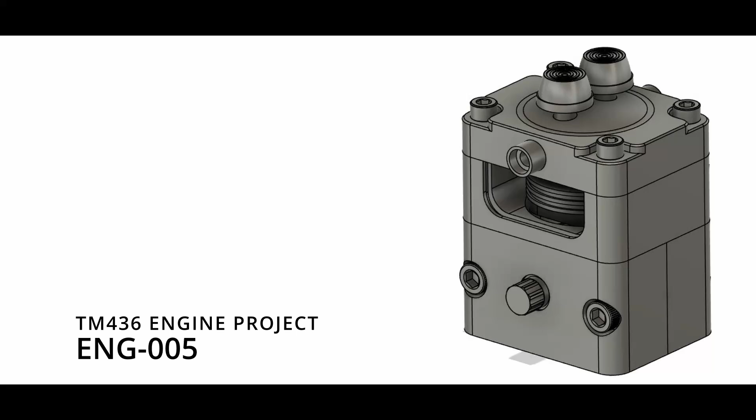ENG-005, which is our engine block cutout. I don't have a drawing for this one today, but I can tell you a little bit about what's going on. Everything's going to be machined as seen. The holes, however, are going to be through bolts for quarter-20 bolts, so we'll make sure to choose the right size bolts for that.

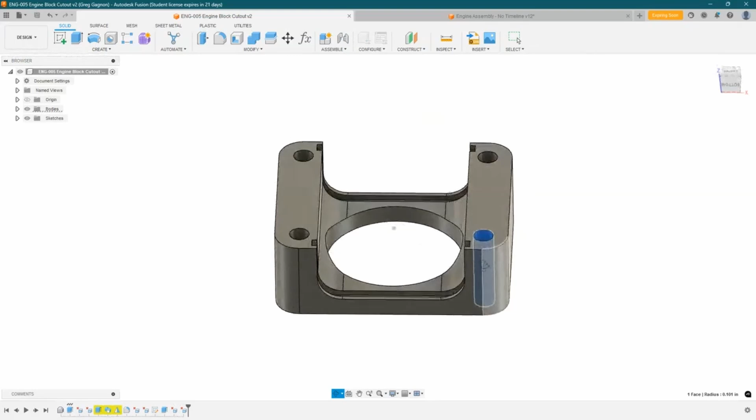Going into this part seems pretty not too bad actually. I see one operation from the top where we can machine most of the part. We will then probably flip it around to the bottom and machine off all of the extra stock from op1.

Maybe we can try something new where we machine all the way through our part in op1 to give us a bore for op2 to locate off of, just for fun. There's no reason why you can't touch off the X and Y as we normally do, but we can maybe try to set our XY zero as the back of our part there.

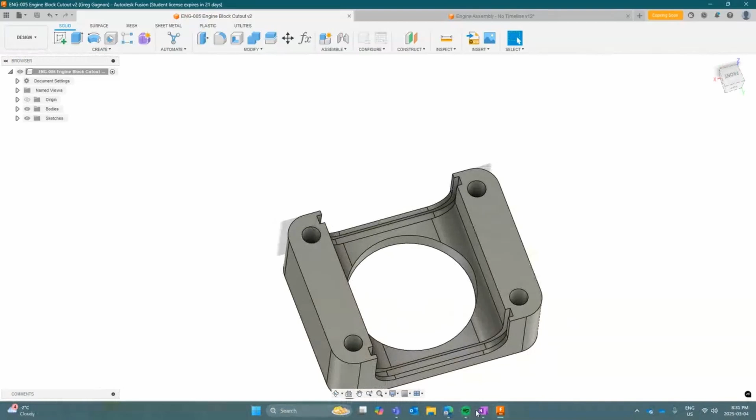And then we'll flip to each side and just stick it up in the vise, and we can do these grooves that will have our glass cutouts sitting within. So I think it looks good to go. We can open up Mastercam and get going. So open up Mastercam 2025 and we'll let that load.

We will try something a little bit different. With the radius, we have two options. We could, as we cut out the grooves, as we stand it up, take an end mill and kind of machine around those surfaces. Or in op1, what we could use is a ball nose end mill to machine that feature, which we might as well try that out to see what that would look like.

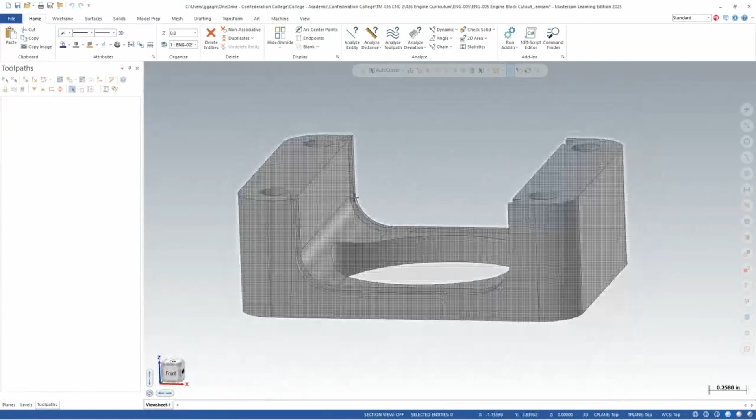I'm going to go to my file and make sure that I'm in inches to begin with. And then I'm going to go file, open, and I'm going to go find my assignment. There we are. And now that I have that open...

Default, let's take a look at what we can do with our stock size. So before we do this, let's go in here and change our toolpath, or just say ENG-005. We will make this program, let's say 436.5, part number 5. Our model is this guy, and we'll come back in and select our stock later once we have that made. So we'll go to our wireframe, bounding box, click on our part, hit OK. Okay, so we have 2.375.

Okay, this looks pretty simple to me. In my Z, I see our Y could just bump up to 2 inches, our Z can bump up to 1 inch, and then we'll have to cut our part to, let's say, 2.5 inches. That leaves us about 50 thou on each side.

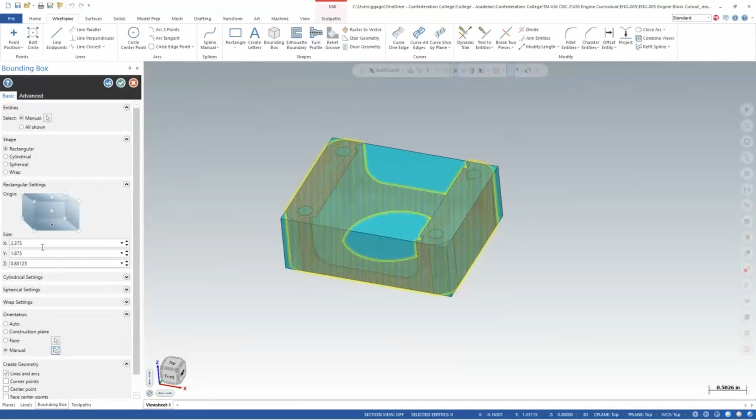So I like that. I guess we can change the orientation to my X, Y, Z. Okay, it is already correct. So let's do that. I like 2.5, it's easy to cut to. Y doing 2 inches is a perfect amount on each side for our Y, and our Z being 1 inch leaves us with some material.

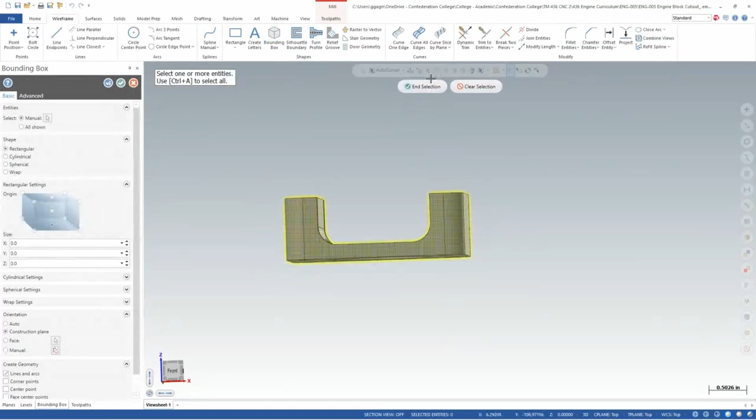Now I should have made sure that this is from the top. Now I probably won't, let me adjust it, knowing how Mastercam is. So let's exit out, let's go back in and try that one more time. Make sure we turn on our solids. And in fact, I should have been having a stock level here, which I forgot to make. I wonder if I press yes now, if it'll do it there or not. Just hit OK.

And that made it within my stock level. Nice, beautiful. As always, I'm just going to take my part and move it 20 thou downwards. And I'll clear out my colors.

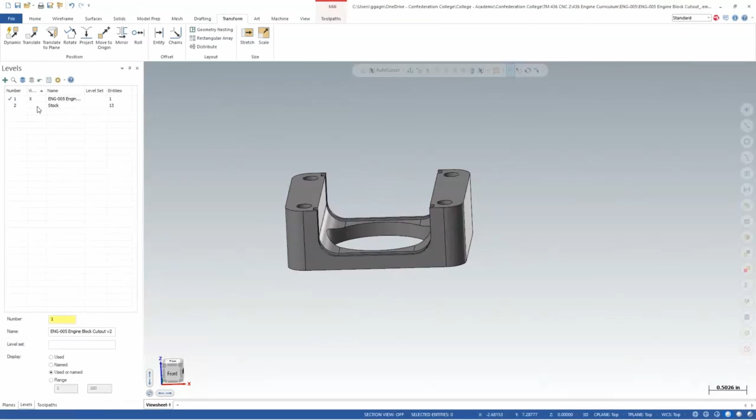I need to set my plane, so I'll turn my stock back on and we can make our plane. I'm not sure if we've done the center of our part before. We could this time if we'd like. Yeah, let's do the center of our part, let's just do it for fun. I know we typically go back left, but for today, let's do it in the middle. That way on the machine, you could see how you would do it if your XYZ was set to the middle of your stock.

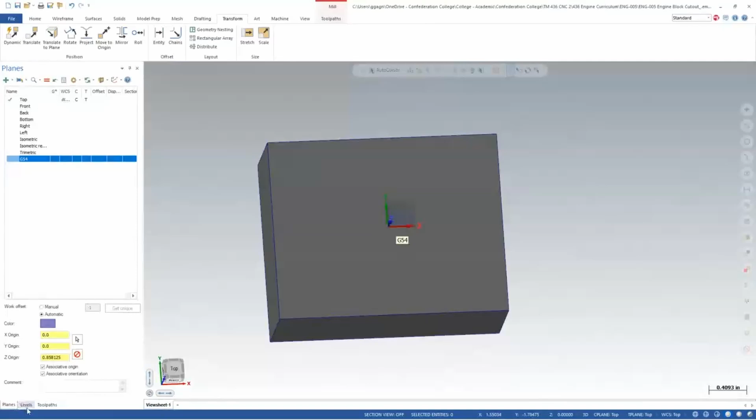We'll call this G54, and we'll make sure that this is actually to the top of our part, not the top of our stock. So we'll just drag that down so that's in line with the top of our part. Hit OK.

Good. We can go back to our stock setup area and we can select our stock as our stock for our simulation. Everything else should be good. We can go ahead and start our toolpath, I believe.

So we'll start with our face mill. We can just grab the top face of the part for that.

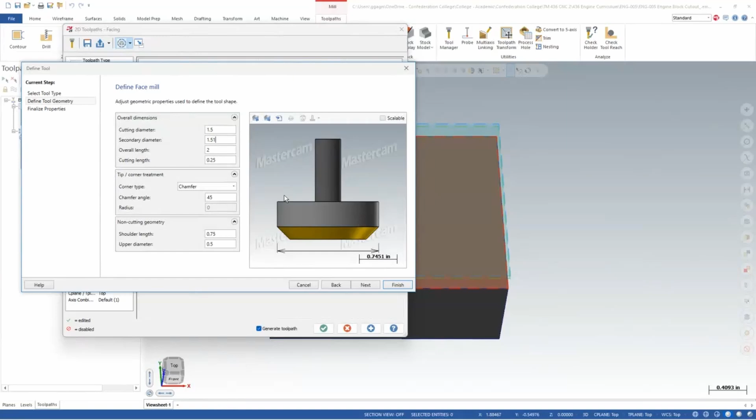For this, we'll select a 2-inch face mill I'm going to use, but in this case, I'm just going to change this to 1.5. I could create my own tool, but let's do that instead. Instead of selecting a 2-inch face mill and modifying, let's just create a tool. Let's select a face mill and make a 1.5 with a secondary cut in diameter. It's also 1.5, but it doesn't let you select 1.5, so just say 1.51. Overall length and cutting length don't really matter that much.

Everything should be pretty good. If we just want to make the upper diameter 1.5 as well, because that's kind of more what our face mill looks like, it does not matter.

For aluminum with this face mill, I like 8000 and 32. And we'll go plunge rate 100. This is 1x2-inch stock, so you will need to do zigzag.

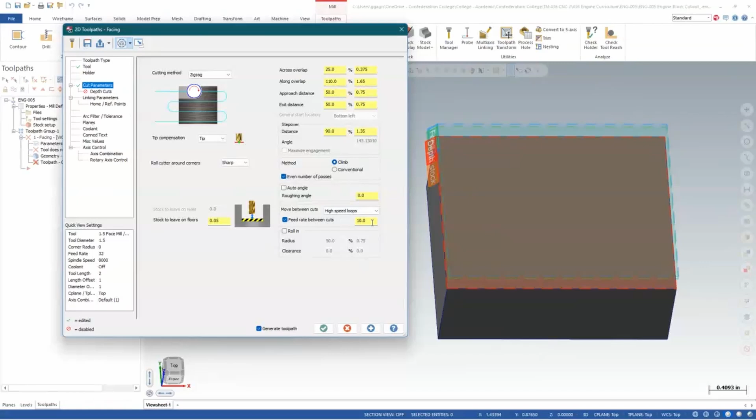We'll do a step over of, I don't know, like 90%. High speed loops. Feed rate between cuts, let's just go to 100. Stock to leave on floor is 0. No depth cuts. We'll do absolute for everything.

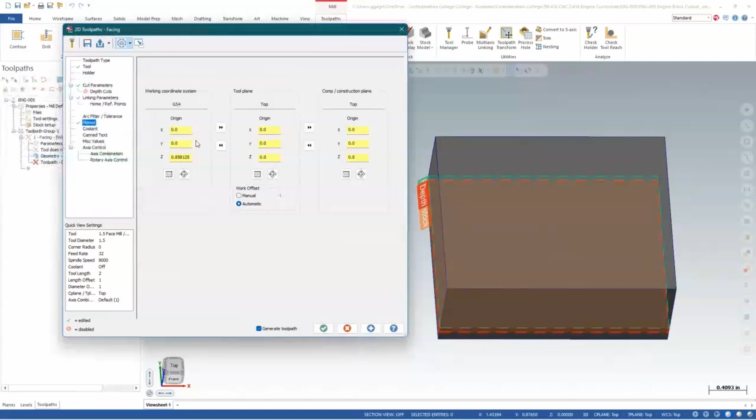0.1, 0.1. Top of stock is 0.02. And this 0. Our plane is going to be actually my new plane. I'll make sure to change that for my next toolpath, and we will turn my coolant on. Hit OK. And there we go.

Should be able to turn off my stock and see that my tool is cutting the top of my part. Before I forget, I'll go to my planes and set my planes to my G54 for all future toolpaths.

Now I'll go and make my stock model to represent what my stock looks like before my OptiRough. My initial stock shape will be based off my model, which will be this guy. Triple click. And source operations will select our facing toolpath.

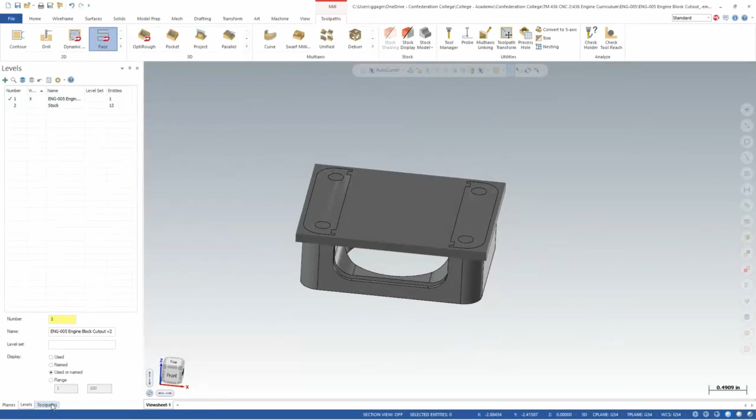And that does not look good, probably because my stock plane is checked off. Let's turn that off. Let's try that again. There we go, much better.

Looking good. We'll do our OptiRough. Our machining is going to be our part as per always, and we'll do 5 thou on the walls and the floors. Toolpath control. My bounding chain will be the outside of my stock.

So just like so. From outside, compensate to outside, and about, let's just say 1/2 inch. It's fine. See if I have to increase that later.

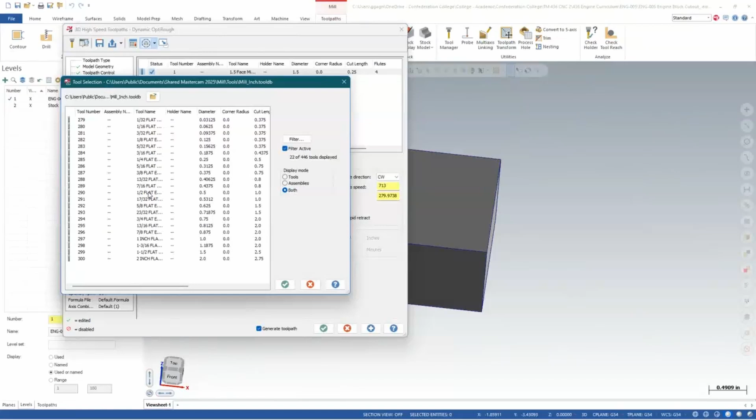For my tool, it doesn't really matter what tool we use, but let's today choose a 1/2 inch end mill. I know my 3/8 does a nice job too, but let's do a 1/2 inch end mill. This will be tool number 2.

Finish. The spindle speed will go, today, let's see. Let's do a couple things, okay? Because I do get the question a lot of times, Greg, how do I know what my speeds and feeds should be? It's great questions.

So let's go to Harvey Tools. I'm just choosing this manufacturer, so I'm going to pretend that I have a specific tool. I know that in my shop, we typically use ISCAR, but Harvey Tools has a good chart that I like to use.

We're just going to go to their end mills. Actually, sorry, we'll go to their products. And I'm just going to pretend that I have a certain end mill. So if you are wondering how to figure out what your chip load is, really everything comes down to chip load, right? I mean, the RPM is set by your cutting speed and your tool diameter.

Now that does matter. You're not going to turn every tool as fast as you can, but typically if you're working within tools that are under half an inch and you're cutting aluminum, you're more than fine to spin that tool pretty much as fast as the machine can. So typically I always do. That's not always going to be the case, but we can get that cutting speed and we can do the calculations ourselves.

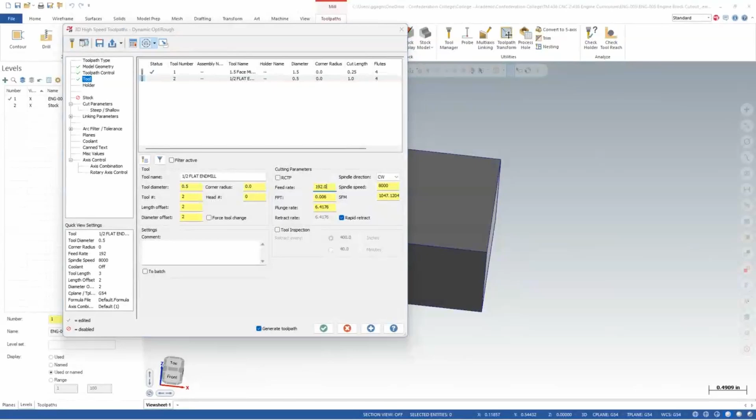If you really want, you can go to a site like this one, which I've been using decently - it works great. Instead of having to look up the charts, I just like to use this. This is pretty good if you're just using standard tools, not a specialty tool like Harvey. When you're cutting a specialty or hard metal with a special tool, you should probably follow the manufacturer's advice specifically. But for just cutting material when you want a good starting point, this site has been working great for me.

So I go to this, what they call Speed Doctor. Let's say I am milling aluminum.

I want speeds and feeds. You just fill out what you need to fill out, so you don't really have to worry about that. You're just going to go find the aluminum you're cutting, so say 6061.

My max RPM is 15,000 on my machine. You could input horsepower of your machine if you want. Hit next, number of flutes. Our tool, let's say, has, I think it does have 4 flutes, or does it have 3? It might have 3. Cut depth, let's just say we're cutting depth of 1 inch, right?

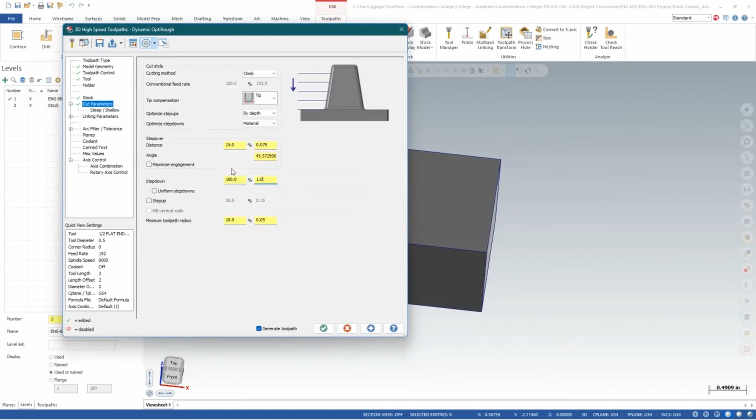So I just apply it to this new part. Myself, I like 12,000, 150 for my end mill. My plunge rate is 100 because I'm not really cutting. We will do a rest material from one other operation, which is my stock, my cut parameters. My step over is going to be 15%. My step down will just be the entire part, so whatever that is - my part thickness was, let's just say 1 inch. And then step up will turn on. I typically like a 10% step up, so we'll do a 10% step up there.

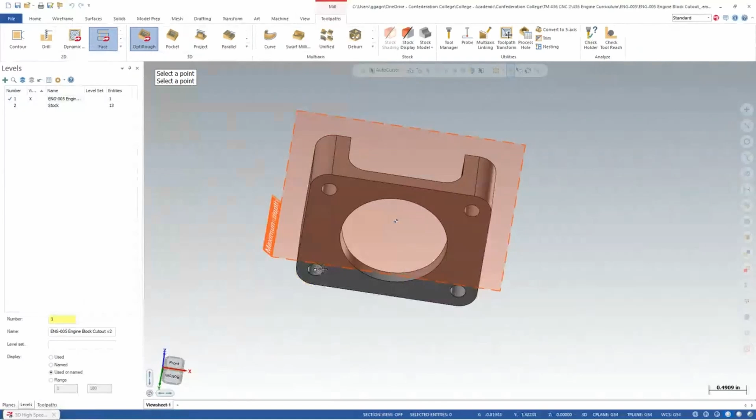We can turn on minimum depth if we want, and maximum depth. Maximum should be... turn off our stock. Right there, and then we will want a little bit of a breakthrough, so let's just minus another, I don't know, not too much, I guess, just 20 thou. Clearance 1 inch, back feed rate 500.

Everything else is good. I don't like when it does a vertical lead in, I just like the horizontal, so I'm just going to do a horizontal. Planes, coolant on, hit OK. See what this looks like.

Okay, I don't love it, so we'll fix this. What I didn't love is this on the outside. I want it machining from the outside more, I don't want it stuck in these corners. Something's getting it stuck, so let's go into my cut parameters.

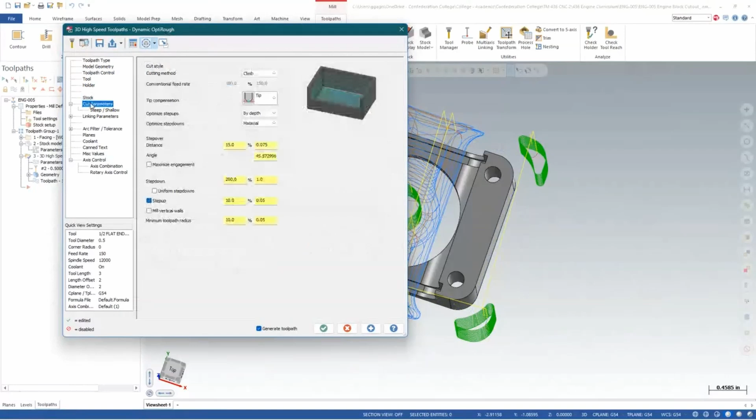Sorry, toolpath control, offset distance - oh, this was supposed to be 0.5, but it probably needs to be even more. So let's just do 0.75 and see if that looks better. Much better, there we go. The way it's working from the outside, and then it cuts in, helixes in nice and well, and then it cuts outwards.

Beautiful. It is plunging when it cuts, but 100 is fine for that. Breaking through a little bit. Nice, I don't love that. I don't like when it does this vertical move on the inside, I just like it being horizontal. It kind of throws me off when I'm on the machine, because I think it's stopping in the Z and then it just still goes a little bit further down.

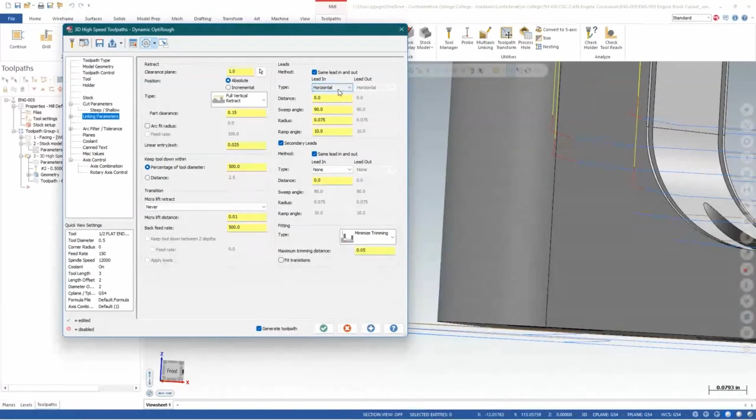It's not the worst in the world, but okay, horizontal sweep angle. Why don't we do, like... I wonder why it does that.

Linear entry exit. Micro lift distance. It's not the worst thing in the world, so whatever, we'll leave it. You'll notice how it steps up those walls because it's actually going to leave.

It's trying to cut that radius, but it's not letting it, right? It's going to cut as close to that radius as possible by stepping up the walls without cutting into it, which will leave just a little bit of material there for finishing for our radius mill. Okay.

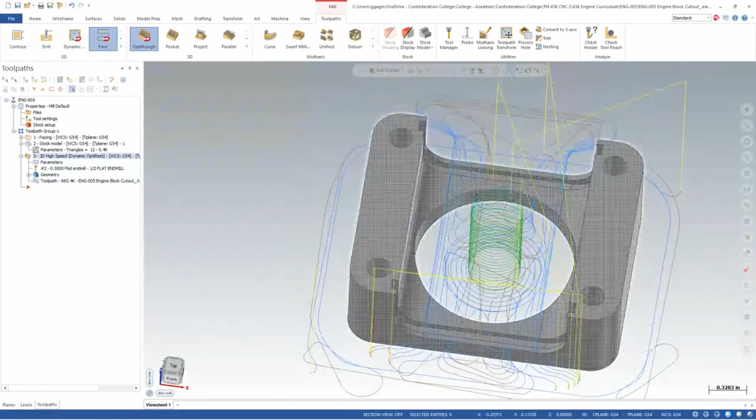Moving next, do some finishing. We'll probably just finish the floor with the end mill, and then for the radius and the wall, we could probably finish that with the ball nose end mill at the same time. We can't use the ball nose end mill to finish the bottom because the ball can't step over, but the ball can machine the radius and the vertical at the same time because it has a straight flute, and then the radius, which will give a nice seamless finish. Then we'll work to get rid of the seam on the bottom. If the tools are slightly different lengths, that transition might not look the best, but we'll get that dialed in.

So let's start doing some contours. Maybe we'll just start with a contour on the outside. Just like so. Okay.

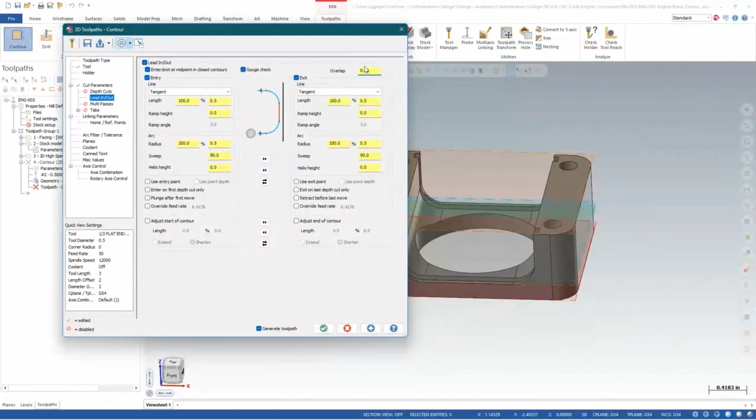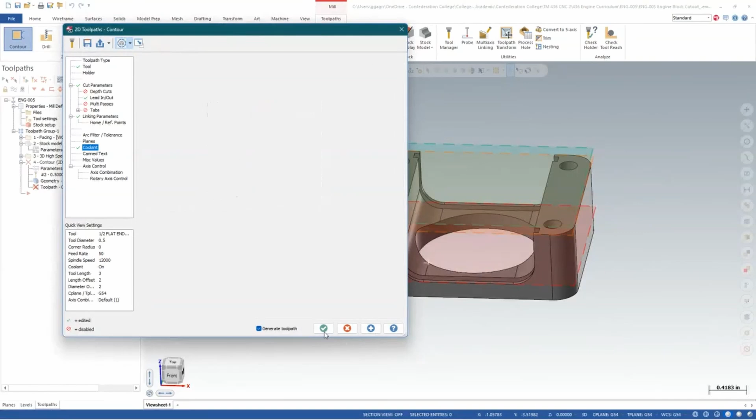Tool, 1/2 inch end mill. For finishing, I like 12,000, something like 50, 100 rapid retract. Cut parameters, we can turn this to wear. Lead in, lead out, turn on a little bit of an overlap. Set everything to 0.1, absolute, absolute. Absolute 0 and absolute, and our depth is going to be right here. No breakthrough. Cool, so we'll turn that on, hit OK, hit OK.

That was not the depth I meant to go to, sorry guys. Mixing up the inside and the outside, so the bottom of my part just looks so. Nope. I don't know why my computer's been like this recently, it's hard to select everything.

And actually, we will turn on a breakthrough, we'll turn on a breakthrough of about 20 thou. My lead in, lead out is pretty big, I could probably take down my lead in, lead out. And let's turn off this enter, exit at midpoint in closed contours. That way my contour starts hopefully at one of the tangent points, that way it kind of hides the starting and stopping. And let's just do, I don't know, 0.1, because we don't need anything too big.

There we go. My tool will start at that point right here. So that start and stop will be left right there, and it will be hidden, hopefully, in the radius.

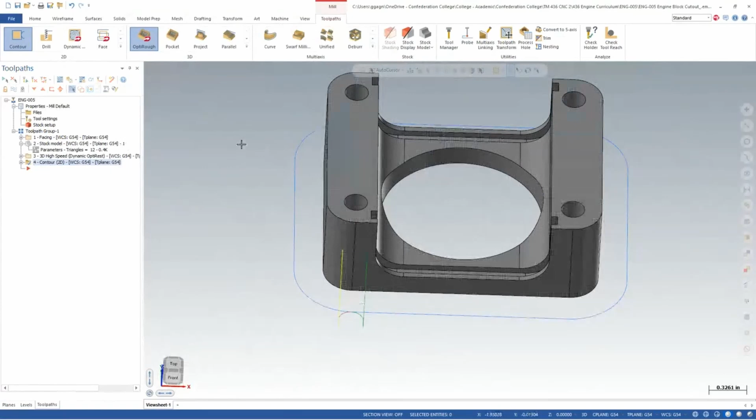Looking good. I will then do some, I could do a contour in the middle. I could do, how about let's do a face? That'd be fun. Or it could be some wasted time there, I guess.

What I want to teach you guys. We could do a face. We could do an area mill. Area mill might be the best. We could do contours, perhaps. Could do. I mean, I like the face, I guess.

Yeah, let's play with this face, let's see if we can get this doing something we want. But before that, and you guys might be like, why? And again, I'm just having fun with it. We want something that we could tell it to cut inside up to each radius. So an area mill might be a good bet, but it might have a lot of wasted time because you might be familiar with the retract. The easiest would just be to get it to do like, I don't know, follow this line as a contour and contour down. But then there's a bunch of air that we're cutting, which we don't want.

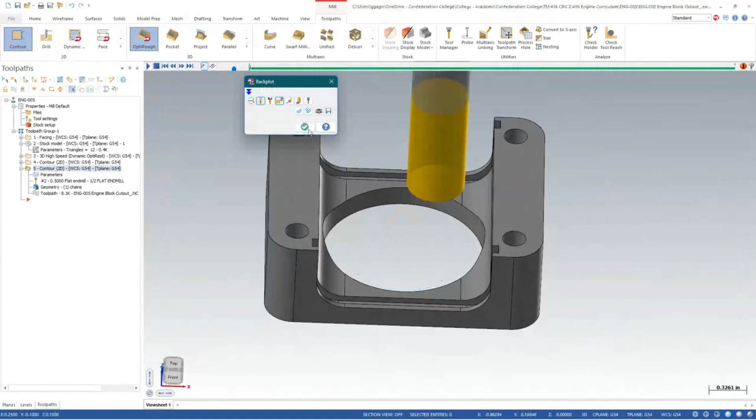Actually, before we do this, let's cut the inside bore, and then we'll get back to that. Okay, how about that? So I'm just going to Control C, Control V, and I'm just going to rechain, and I'm just going to select the inside of this part, which everything else should be the same. So like, bam, done, easy. Okay, now we can do the next one.

So what I'm going to do is I'm going to create a level. I'm going to call this my wireframe level.

I'm going to draw some lines here just because we have this little gap that will mess with me, so I'm going to try to draw lines to just avoid that. Right here and right here. And then I could just curve this edge and this edge.

And then we could do that on the other side too. But let's show you some other cool tricks. Again, this is just about learning. You don't have to do it this way, but let's play with it anyways.

Let's try this facing out. So let's do a face. Let's select it to wireframe chaining right here. And I guess, oh facing, well it's going to extend both ways.

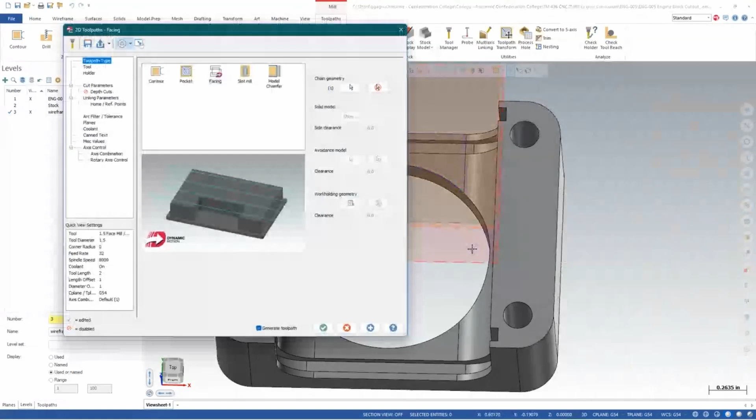We can fix that. For this, we'll use our inch and a half, or our half-inch face mill. Sorry, face mill, half-inch end mill.

Don't have to use a face mill to face, right? Plunge rate is going to be 100. Cut parameters, we will do a zigzag, step over percent. We're finishing, so sure, a 90% step over is pretty good.

We're going to have to come back and modify this in a little bit. We don't really care about even number of passes. High speed loops, 100. In fact, we can do whatever, 100's fine, 100's fast enough. 0.1, 0.1, top of stock, 0.02.

No, top of stock is about right here, but it's technically 5 thou above that. And then our depth is right here.

Planes, no breakthrough, right? Okay, so planes, coolant, make sure that's on, hit OK.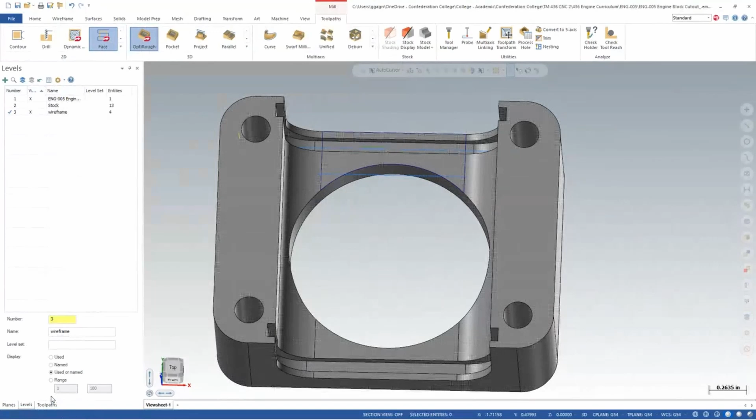Now, as we can see, our tool is crashing to an extent into our part, and that is fine. I did expect that. We could watch it just so you guys can see, and we'll see if we can fix that.

Let's change my roughing angle, because right now it's cutting left to right, and I want it to cut up to down, or front to back, however you want to think of it. So I'm going to change my roughing angle to 90.

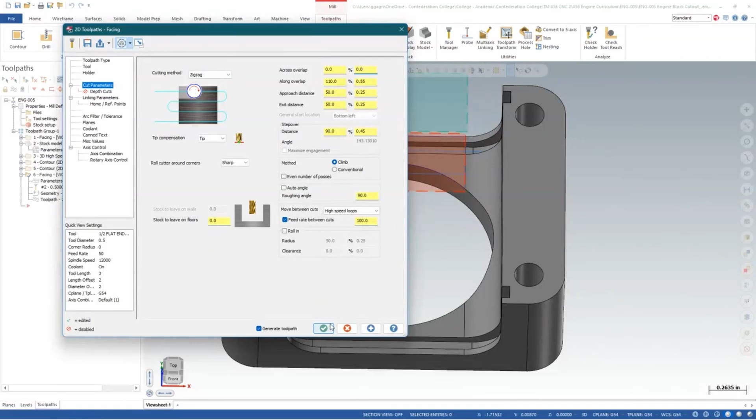And I'm going to do my, I believe I'm probably going to get mixed up here. Is it my along overlap or my across overlap that I'm looking for? My across overlap. If I set this to 0, well, one of these two, I know that my end mill will not pass that line. That's the along overlap, how much it overlaps past it. I think I got it right.

So you can see this tool comes in, cuts across on that line, it doesn't go past it. Typically the face mill always goes past that edge, but because I changed that along overlap, it fixed it. And there we go, in 3 passes we got that done.

Now, I'm going to go to the other side and do the same thing, but I'm going to show you a little cool trick. How about let's try to do something like this, where we go to toolpath transform, under toolpath transform, and let's select this facing that we just did, and let's mirror it.

I honestly haven't done a mirror before. I've done a lot of the other ones, not a mirror, so just play with it. Mirror, actually, I might have done a mirror. I'm trying to think. Facing, okay.

So we're going to copy source operation, and we're going to disable posting in selected source operation. That just means it's going to create a separate toolpath. It's going to copy the first one, meaning it doesn't delete the first one, but it's going to disable posting. So a little ghost is going to appear there. Work offset is going to maintain source operations.

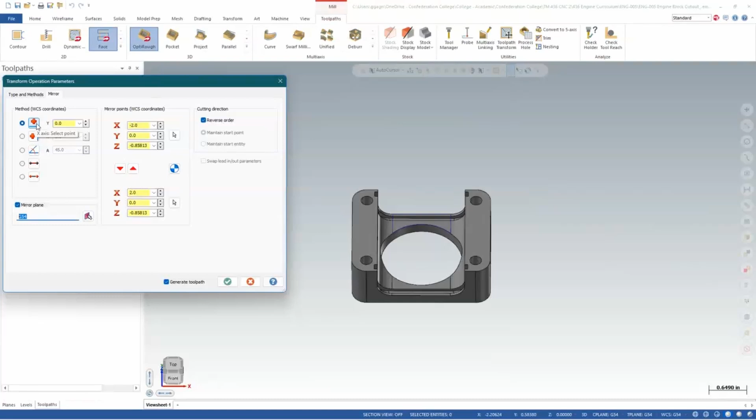Geometry should be fine. Mirror, we're going to mirror over our Y0, which I'm not sure if this Y0 refers to, oh yeah, mirror plane G54. So my Y at my x-axis, it's mirroring over my x, which my x is my center of my part, which turns out to be perfect.

Oh yeah, come on, give it to me. There we go, look at that.

So instead of making a new one, I just mirrored it. You might be like, why? Well, sometimes it's cool to be able to do this stuff. There obviously are times it's really nice to use this toolpath transform, because you have to do multiples of the same toolpath instead of making it over and over. It's perfect - instead of having two separate toolpaths, now I just have one.

If I want to change anything for this toolpath, I have to go into the original facing. I could change parameters like the cutting speed, whatever. I'll update it, and that will update this toolpath, which is really the one that posts. This one is here, but it's ghosted, meaning it's not going to post - it's there, but if you want to turn it on you just press the ghost. These two are fed off of this toolpath right here. So a kind of cool toolpath for you guys, a little learning experience I guess you could say.

Now, notice how my tool starts so far off my part. How about let's change that? Why don't we go and change my along overlap to - well, how much further can we go? Can we go, I wonder if we do 0.26. I'm not sure if it goes by diameter or radius, so we'll see what it looks like here.

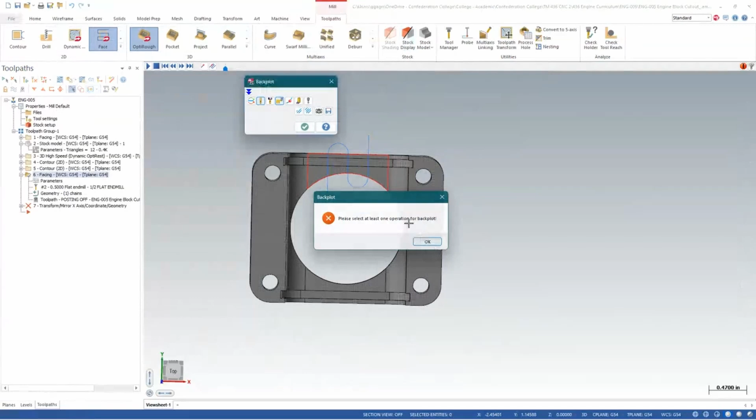Does that save us time? Or is our - yeah. By the way, you can't backplot a ghosted operation, so you'd have to...

What's going on here? Okay, so ghost this one, see what's happening. My tool comes down - I don't like how it comes straight down onto it, so we'll extend that out a bit more. We'll go to along overlap. Let's do 0.4.

Right, sorry, post this one. Really, we're just trying to save time, right? I don't like how it's coming around on my part. So that would be - sorry.

We do want to go back to that one more time. We will want our along overlap to be at least 0.5. So let's just do 0.55, which is probably what it was at before, but this is probably what I'm gonna change.

Approach distance, let's change that to 0.1, or even 0.05 would be nice. We don't need that much approach and exit because the part's not going anywhere - it's still the same.

How many times am I gonna do that, guys? There we go, there we go, there we go. Did that even do much? Probably not.

But we might have saved a little bit of time, and in a job shop, every second counts. There you go, looks nice.

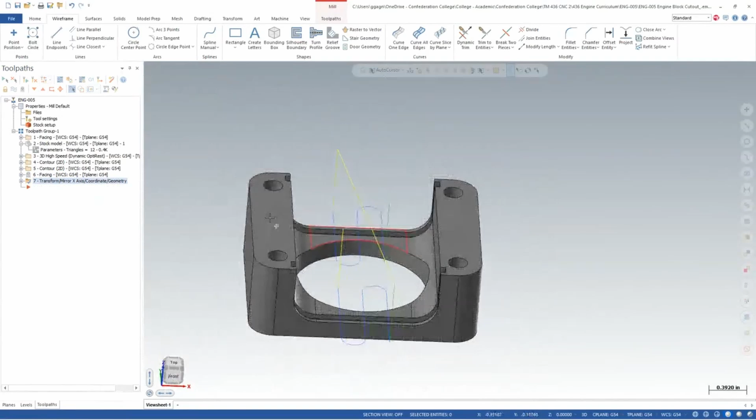Okay, time for our ball nose end mill. So we'll use a contour for that.

My contour is slightly cut off, so I might want to make a wireframe for this - I might just want to make an actual line, because I can't select this line and this line separately. Well, I could select them separately, but it'll think I'm doing different contours. If I just do one line like that and one line like that, that'll work out well. Hit OK.

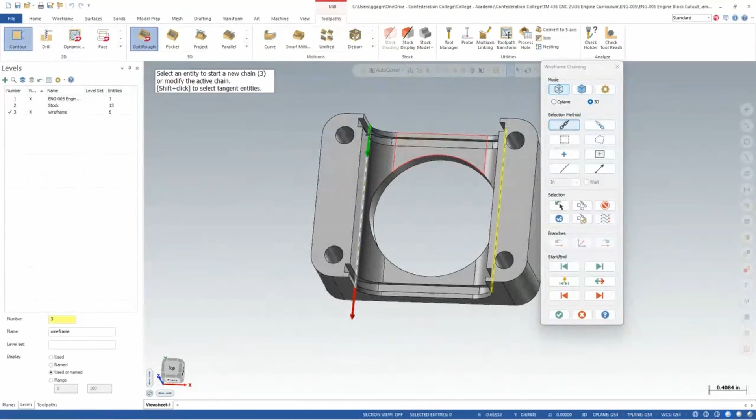Then we'll go to our toolpaths and go to contour, and we'll select this contour, making sure you're selecting it from the right side so the arrow goes the right way for our climb milling. We'll do that, and we'll choose our new tool, which is going to be a ball nose end mill or sphere - a 1/2-inch sphere.

Same with the flat end mill. I like about 50 inches per minute for my feed. My plunge rate is about 100. Cut parameters, we could do wear - that's fine.

No depth cuts. I mean, we could do a rough and then a finish if we want, but it should be fine to do all in one. Overlap, we don't have to worry about that.

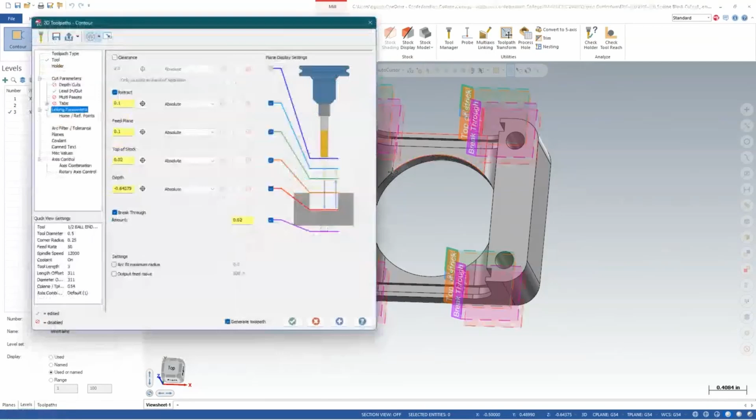Linking parameters, my depth is going to go to right here. Top of stock is 0, no breakthrough. Planes, coolant on, hit OK.

And I don't like radiuses when I'm just doing straight lines on my contour, so I'm going to go back to my lead in, lead out, and just get rid of my arc. I don't know, it's just something about it - I just like a nice straight line.

However, I don't like how my tool is coming down onto my part like that, so we should increase our - in fact, probably 0.26, that way it's a bit more than the radius, just like so.

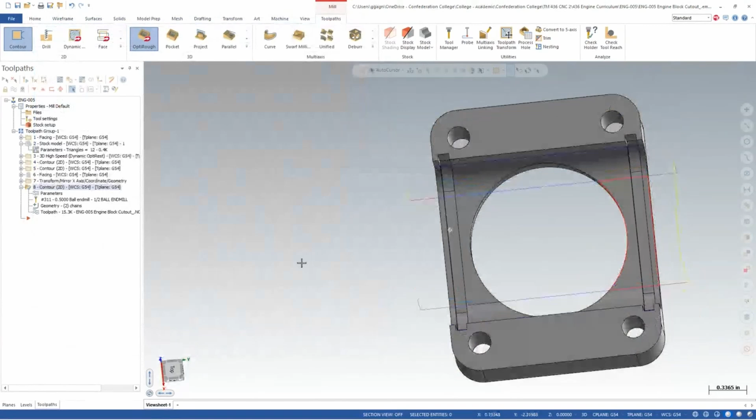See, that'll leave us with a nice wall finish and floor finish as well. Bingo, very nice. Okay.

Next thing we could do. Hey, didn't I tell you guys we were gonna go all the way through my part today? I think we did. So we can. How would I want to do that then? I'm just going back in my mind, right?

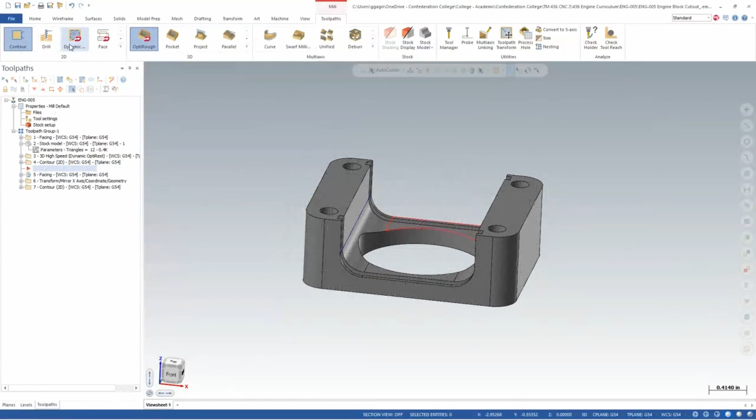I guess we could just do a circle mill that goes all the way through after as my finishing instead of this contour. Sure, let's do it like that. Let's get rid of that contour. Let's do a circle mill. Let's select my circle. I'm just doing this to get my tool to go all the way through my part. Probably slow this down to 50.

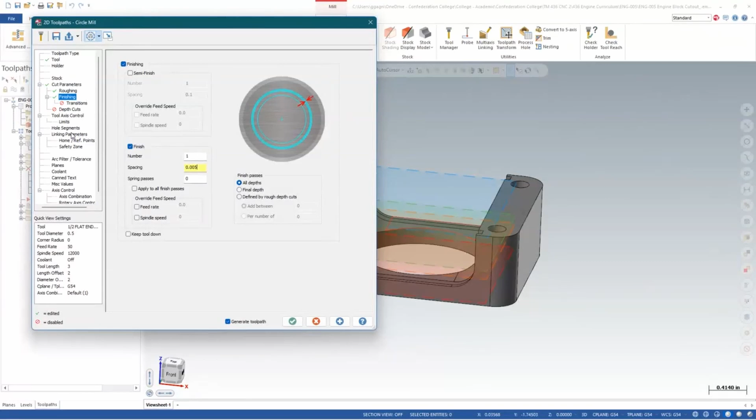And again, this is just more for learning. We will want a roughing operation, and we will want a finish on the wall, which will be a 5/1000 finish pass. My end mill has already machined a lot of that, so the top of stock is technically really the bottom of my part right here, because we've already done a lot of it with the roughing tool.

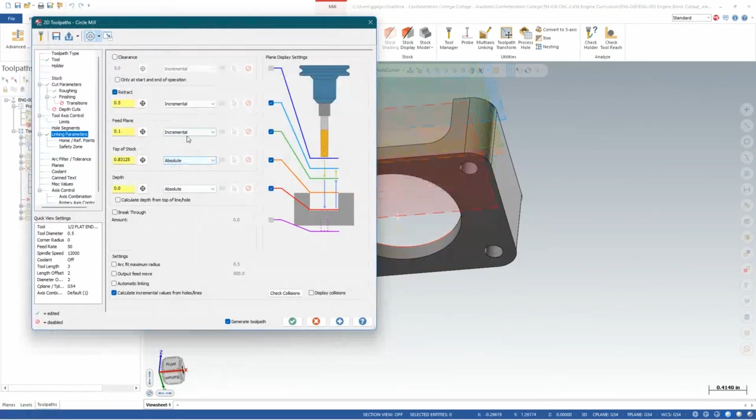My computer does not make me happy with my selection tools right now. Apologies. So top of stock is going to be right here, depth is gonna be right here. No, actually depth is gonna be my part, so that's gonna be right here. And yes, we will do a breakthrough of, let's say, 50 thou.

Okay, and then that works as our finish for our inside of our bore as well. And then we'll have our stock roughed out completely. Again, just for fun, you don't have to do it this way. I think it's just kind of fun to see that we can do this. So rough it through, and that looks nice. Okay.

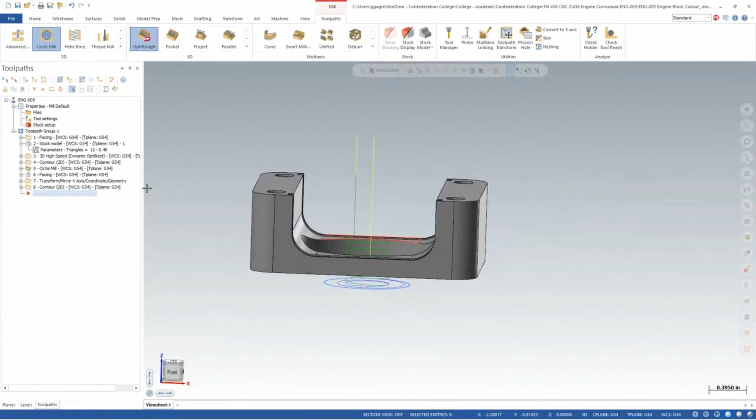Moving forward, we will do our next toolpath, which I got distracted from. So we have everything done, the circle mill. I guess it's just, am I wrong to say that it's just the holes that are left? I don't think so. I think that's fine.

So we'll do these 4 holes. We will do our drilling—not thread mill, sorry guys—drill, and we're gonna select this hole, this hole, this hole, and this hole. Now, can I show you guys a cool trick? If you just hold control, so if I just go to select a hole and hold control and click it, it'll click every single hole that's the same diameter. Just a little quick trick for you guys.

Now, in the end, this is gonna have to be, I believe these are, I guess they're 10-32 holes, right? Because the top of our—am I second guessing myself? The top of those parts were definitely 10-32. Am I correct to say that? Let me see here. 1 second.

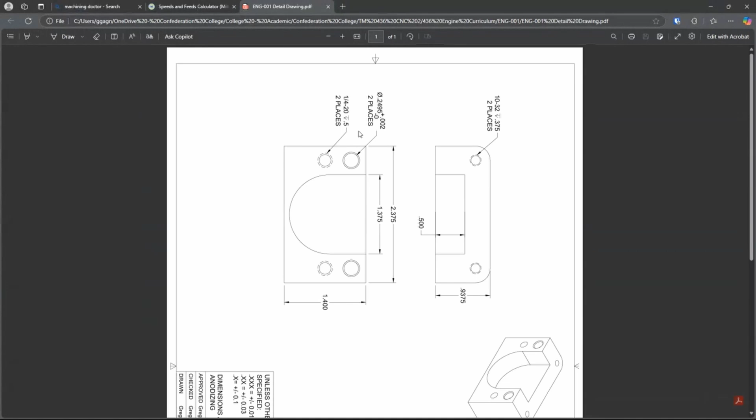TM 436. So this connects the top of our part. So I'm looking for ENG1. That's fine, my drawing. And the top—yeah, okay, the quarter-20 was from the front. This is 10-32 from the top. Okay, so this is a 10-32 tap or through hole. Okay, so whatever, we'll start this.

Keep that in mind. Tool—I just had a thought in my mind, I want to make sure. By the way, this ball nose end mill, I should change this to tool number 3 while I'm at it.

Actually, no, let's figure what size hole we're going for first. So let's go to the site. Let's go—in fact, I probably have a tap drill chart of some sort for you guys. That's not the one I want. Sorry.

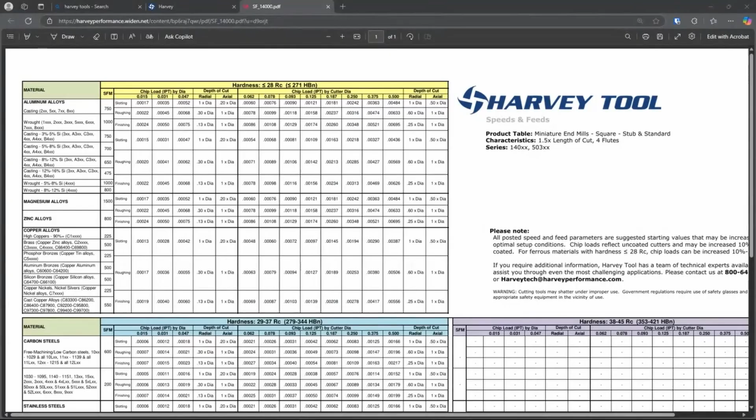Okay, so for a 10-32, our clearance hole is going to be 10-32. Clearance hole for a close fit is going to be a 0.196. We're going to go for a close fit today, so we're going to go at number 9, 0.196. Let's do just a little 10 thou chamfer just to make it a nice starting point, or just like a nice clean edge. So I'm going to say my finished diameter is 0.196 plus—actually just do 5 thou chamfer on each side, so a 10 thou, just to kind of help get rid of the burr, and that will calculate how deep it needs to go.

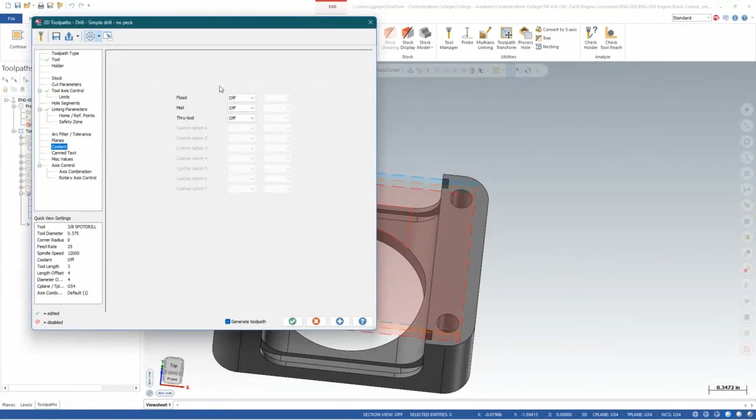We're not going to do tip comp. We will make sure our coolant is on and hit OK, and bam. I don't really like how it's doing this crisscrossy thing, it's a little bit inefficient. We can go to our geometry and change the pattern to—let's do, is there one that just says... okay, let's do something like this. That's fine, doesn't really matter.

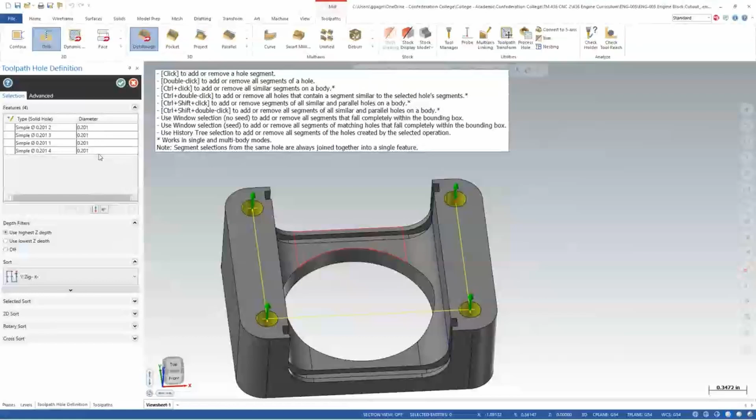Technically, it's best to start at the back left because that's closest to where our tool changer is. It's the quickest hole to access. Just make sure that that's not cutting too close to that. Looks good.

I'm just going to copy and paste this, and go select my next tool, which is a drill, I think it was a 0.196, a number 9 drill, that sounds right. We'll make this tool number 5.

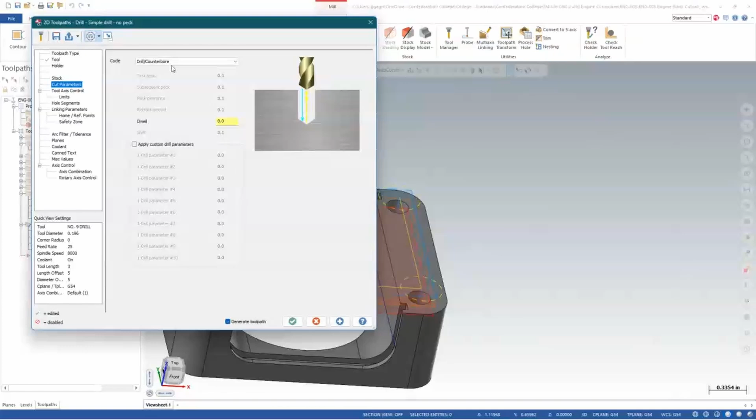Now, one thing I am worried about is if we have stock on the bottom—never mind, we're not gonna hit my parallel, so we are good, not to worry about that. That looks good. We are good, I think, for my op1.

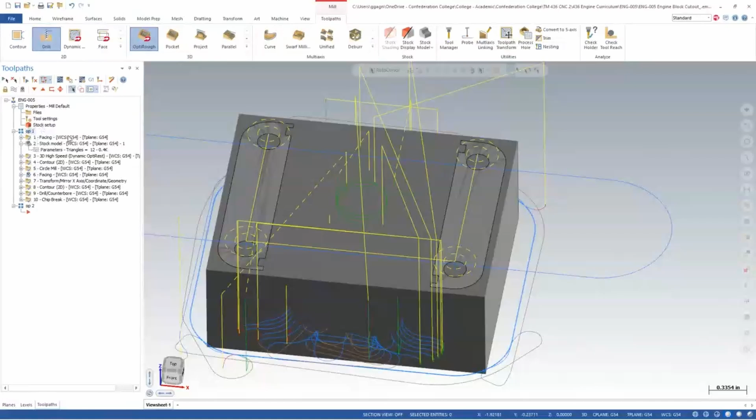We can go to my tools and make a new toolpath group, and we'll call this one op2. At the start of my op2, I could make a new stock model just to see where I am at with my tool or with my part, based off stock model 1, based off all of these toolpaths.

Okay, my part's looking nice and good so far. Kind of curious why it is not shiny on this inner wall, so it makes me think about this toolpath. I just want to make sure there's no stock on my walls. It's probably just a glitch in the system, to be honest—that sometimes happens.

Okay, we'll move our starting point down here, and we will just face off the back of our part. Now you can see we cut through the bottom of my part, so this is accessible now to set our offset for op2.

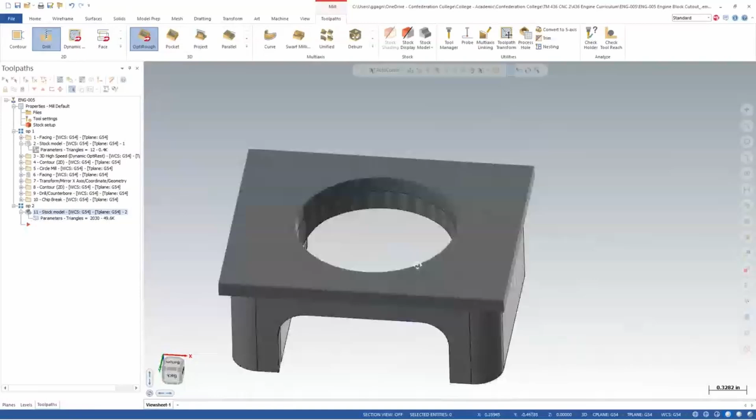We'll still have to set the offset off the bottom of the part and then move it up the thickness. But now for my X and Y, instead of measuring off my vise sides, the front of my fixed vise and the left of my fixed vise, we can just drop our probe down in the center of the bore and measure off that inner bore. So sometimes it's a really good option—if you have a hole in your part, you can make that hole go all the way through your stock and use that as your op2.

Now you guys might think, hey, for my assignment, that would be a perfect way to set your op2 plane for your big assignment 1. So in doing so, I'm just going to get rid of this right now, and to select the inside of this bore, I'm going to grab onto this bore, and hold Control, or Shift.

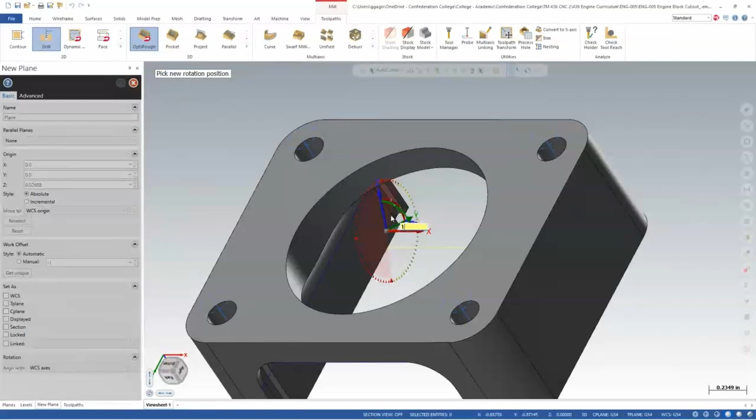If you hit Shift, it'll let you select the center of that, and then we will rotate this. Now, does it matter which way my X and my Y faces go? No, because this part is symmetric, so it doesn't matter how the operator puts this, just as long as the cutout is facing us is really all that matters. Hit OK, call this G55, and then manual, we'll do this as 1.

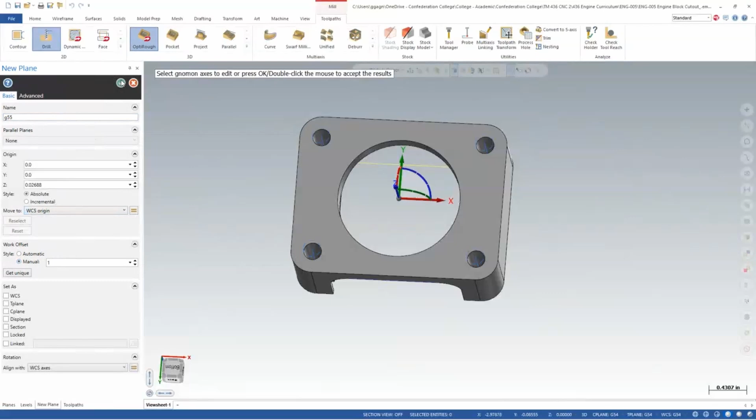Now I'll go to my planes, make sure I'm selected onto this plane, and I can start my toolpath. I might just grab this first toolpath, copy it, and paste it below—I already made this toolpath once. I'll just change my plane to be my new plane, and do my cut parameters, or my linking parameters.

My top of stock is a little bit different, so I will make my top of stock the back right here. My depth should be 0. And I will want to turn on step downs as my last thing. So cut parameters, depth cuts, we'll do a max 0.1 and a finish cut at 10 thou. Keep tool down, so it's 3 cuts in the end. Sure, that works fine for me.

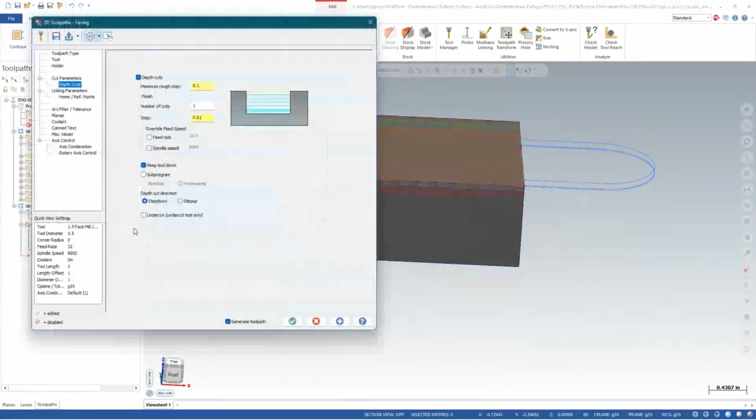After that, we can turn back this stock off. That's it for op 2. We could chamfer the part, but we'll leave that for ourselves since we don't have much time making these parts. We'll go back up here and select new toolpath group.

We'll call this op 3. And then we will get rid of that. If I wanted to, I could make another stock model. I guess that's what I've been doing, so might as well. They're so easy to make.

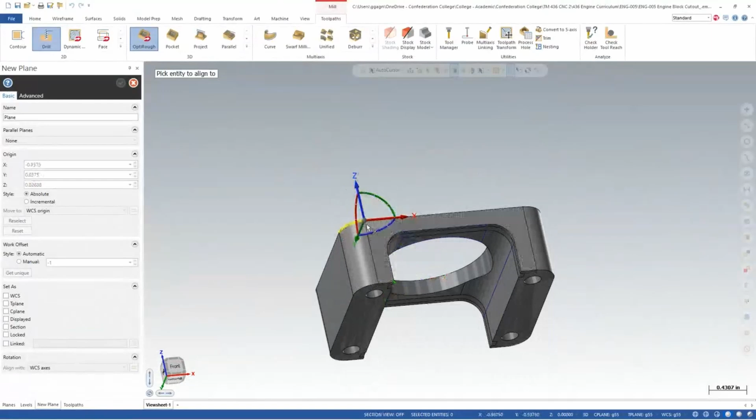When I put this in, I'm going to stand my part up like so in my vise. So let's make the X. Let's have some fun - no, let's keep it simple since I know I probably won't be able to give you guys all my time. So let's put my origin at the corner of my part, just like we like it. G55. And we should be good to go.

So we'll just do a contour for this when we do this kind of slots. Nice and simple. We'll go based off our solid and we'll just grab this inside wall like so for my tool to follow.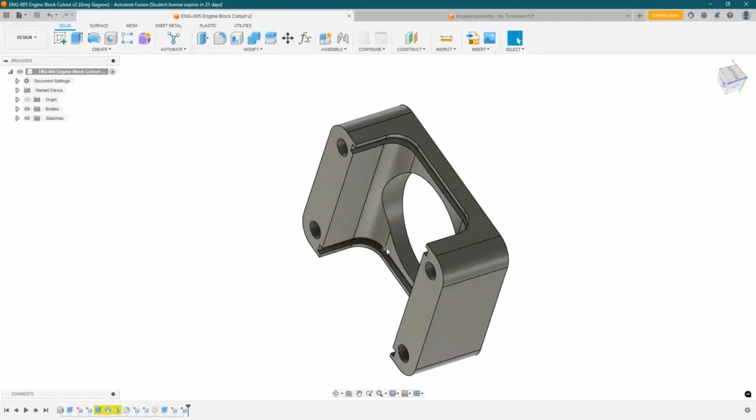And then we will use a specific tool. We're gonna use, well, we know that's a 1/2 inch. I'm not sure exactly which one we have. I could go to my Fusion file here and see what's inside. This diameter is 0.5, so we can't use anything bigger than that. Which I'm not even sure if we have one of those, but hopefully we do. We will figure it out if not.

So ideally, I'm going to filter for a slot mill like so. And if there's none here, we're going to create a tool, which is more than fine. So we'll just say create tool. We're going to do a slot mill next. Let's say that this is going to be a 0.5 with an overall length of 2, doesn't really matter that much.

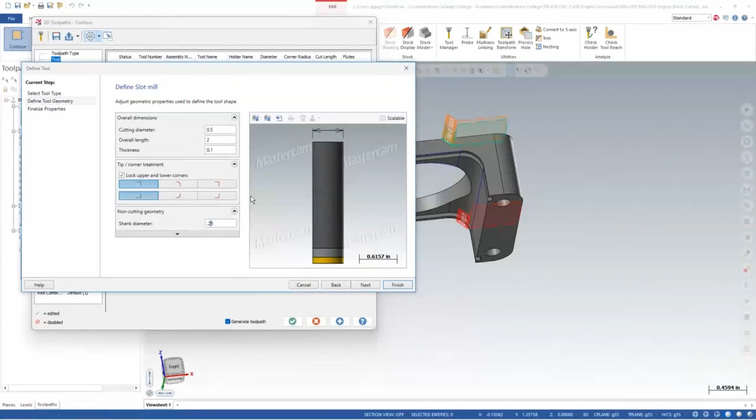The thickness of this tool, well, we're going to want it to be the thickness of the slot. Hoping that the thickness of the slot is something nice, like 0.1. Let's just go with this. I might have to change this based on what tools I have available. I will warn you, the shank diameter, let's do 0.25. And that should be good. We'll just call that our tool.

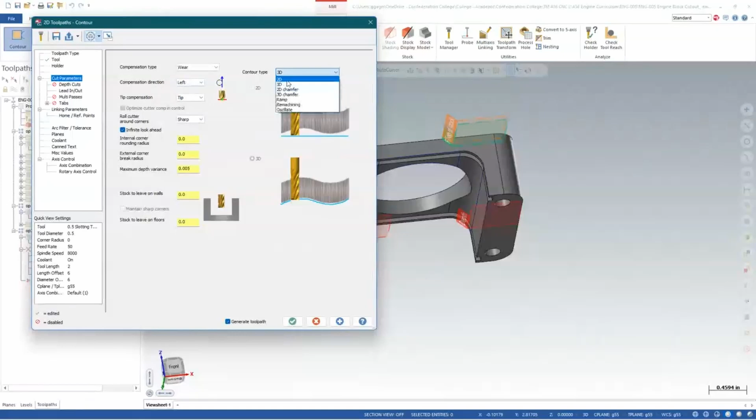Cut parameters, wear is fine. That's good. Contour type shouldn't be set to 3D. That sends off alarm bells when I see it set to 3D. Something might be off with my plane or my geometry selection, which made it think it was a 3D contour. I like that. Top of stock is right.

Oh, that's why, because my plane's probably set wrong. I thought I made a new plane, didn't I? Well, that's why I thought it was 3D. Okay, so let's do this for now. It's not going to be happy with me. That's fine. Let's go to my plane, see what's going on here.

And G50 - oh, I see. G56, we want to call this. Levels, toolpaths, parameters, planes, G56, that's what I'm looking for. There we go. Coolant should already be on.

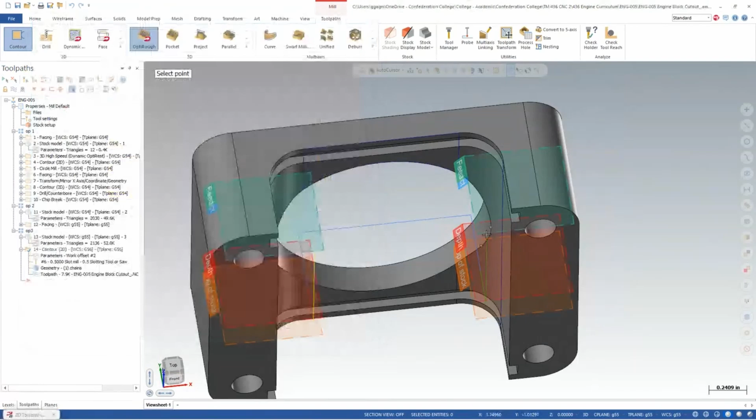Hit OK. Now we just still have to modify the depth, which is why I messed up, because I noticed that was a mistake there. So there and there, no breakthrough, just like that. See that we're cutting that. Beautiful.

My other side is the exact same. So really what I could just do is take this entire group - or should I go to group? What happens if I do that? What if I go... well, doesn't really matter because this is gonna be the same. I'm gonna have a stop and I'll flip my part. It'll be the exact same toolpath.

I might as well just throw in this exact same contour right next to it. And then in my parameters, I could actually just say misc values. I could just say... what am I looking for? Canned text - oh, I could do a stop before.

Turn that on, so before it does its toolpath, it'll stop. I can flip my part in an ideal world, and it will just machine the second one. I don't have to have a new plane.

I could set up a new plane if I wanted to. In fact, to make this look like a completely machined part in Mastercam, I'd want to do the same thing. You could make another one, but in reality I know it's going to be the exact same. For today, does that matter? Should we just do it to say we've done the entire part? Probably—let's just do it the right way anyway.

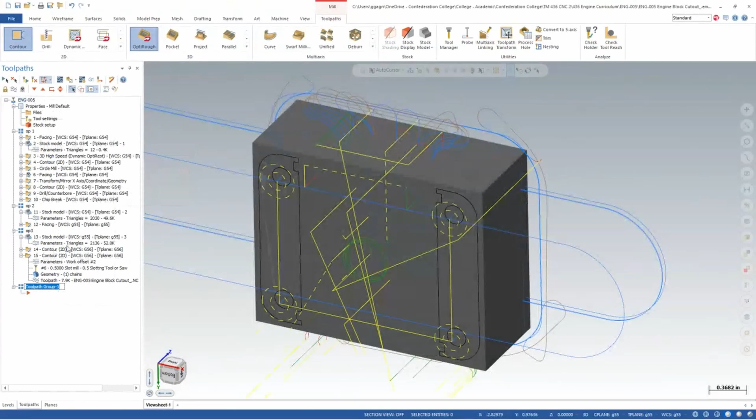So I'm going to create a new toolpath group just because it looks nice. Then you can verify all your toolpaths aren't crashing and stuff like that. We'll move this down to here and set up a new plane on the other side, like so.

So I'll just make this G57, even though it's technically a different plane—it's the same. Actually, let's call this G56-2. Really, we won't set a G57; we'll just use the same G56 coordinate, because it's going to be the exact same for our part anyway. So yeah, there we go.

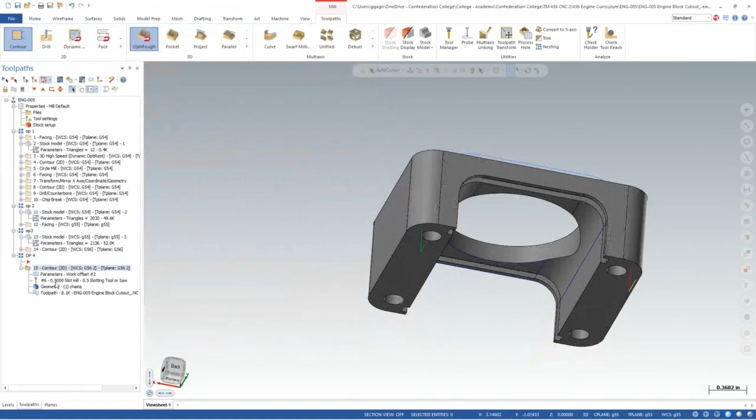Toolpaths, planes—just switch this to G56-2. And then it looks like we just have to flip our side. There we do, and there we go. We can now just grab this and verify that this works.

Beautiful. The holes look a little weird, but that's because I changed the size on the fly. Everything else is good, guys. That is it—we can now just quickly make a setup sheet, I guess. Let's go and do that.

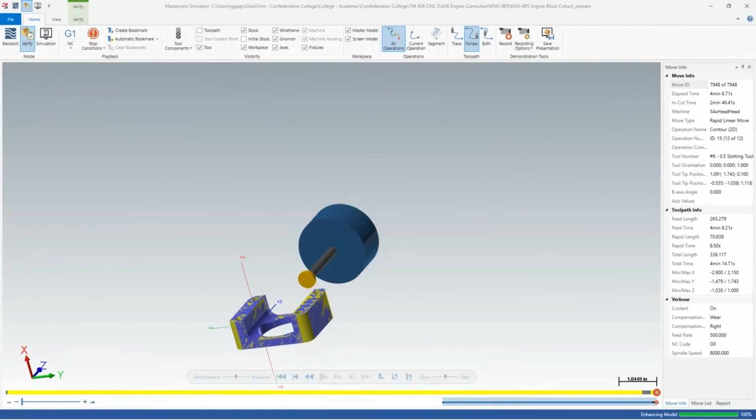We're going to use an old setup sheet. We'll just save this as ENG5 job sheet before we make any changes.

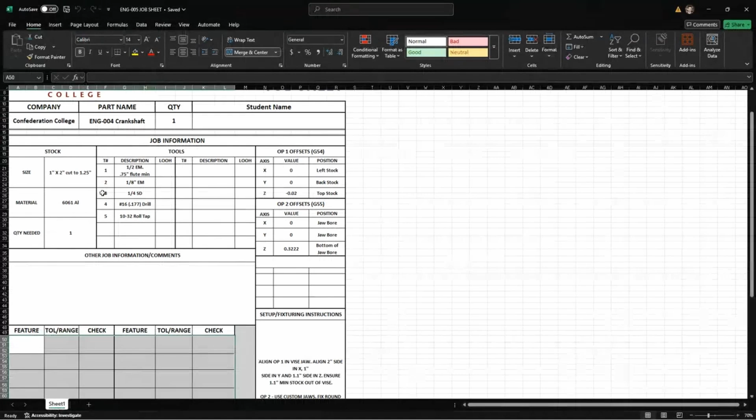Okay, this is 1x2 cut to 2.5, if I remember correctly. One, Engine 5. This is called Engine Block Cutouts. Get rid of this for now.

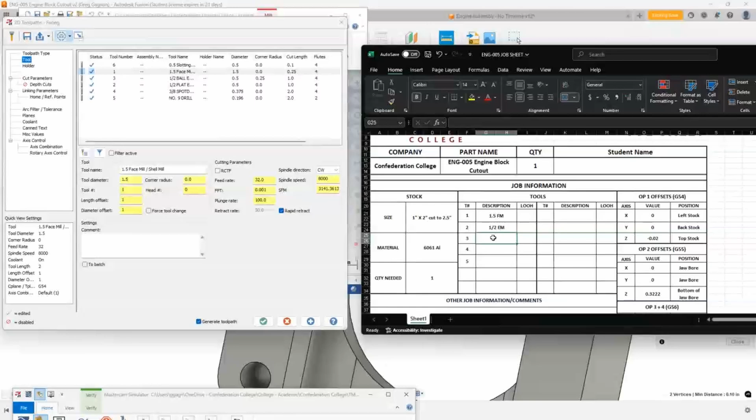Okay, so tool 1, I'm going to bring this up. Tool 1 is a 1.5 face mill. Tool 2 is a 1/2 inch end mill. The length of the hole doesn't really matter, but it will need a decent amount of flutes—it's cutting all this at once.

So we'll need a point. Ooh, I wonder if we'll have that—we might have to step down. We'll see. .85 of flutes. Tool 3, 1/2 inch ball.

Tool 4, 3/8 spot drill. Tool 5 is a number 9 drill—number 9, or 0.196 drill.

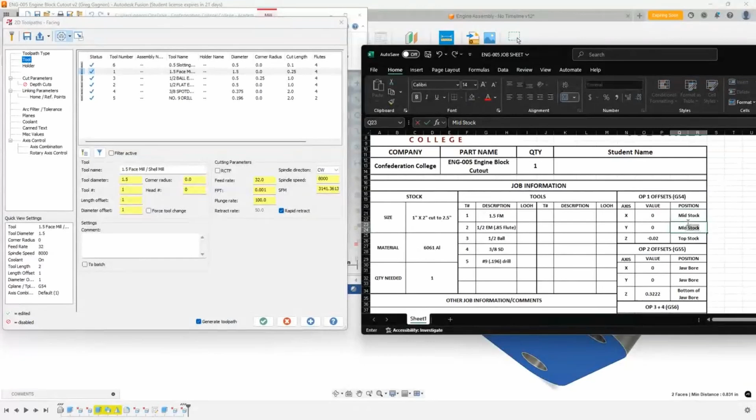Op 1, 0 is... I did throw that in the middle, I just call it mid stock, and it is 20 thou from the top of the stock. Op 2, we're going to call this 0 is jaw bore. Jaw bore, and this is going to be top parallel.

And that would be the thickness of our part, 0.831 inches, positive. Op 3, we got an XYZ here—zero, zero, zero, left side part, back part.

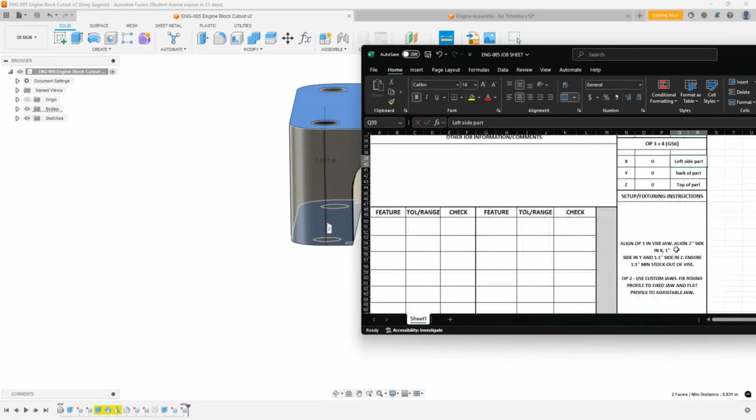You could just say top of part 2—make it better. Align op 1 in vise jaw.

When we go to machine this, we'll try to use both vices. So let's see, align op 1 in left vice jaw: align 2.5 inch side in X, 2 inch side in Y, and 1 inch side in Z.

Let's say—do we make it that close? Ensure... well, we might have to. Ensure 0.88 inches stock out of vise. That's going to be tight—that might only leave us with about 10 thou based on my calculations, but we'll work with what we have.